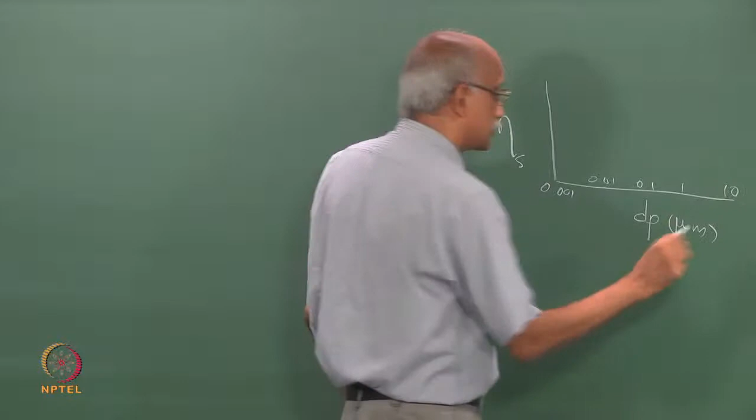So if you plot this single fiber efficiency that we talked about in the last class as a function of particle size, starting with 0.001 microns, 0.01, 0.1, 1, 10 and so on, what do you think this curve will look like? I will give you a couple of choices: is it going to go like this? Like this? Like this? Or like this? Let's say these are options 1, 2, 3, 4.

How many think it will look like option 1? Option 2? 3, 4. Okay, let us do this again. How many for 1? Show of hands. How many for 2? 1, 3, 2, 3, 3, and 4, and the rest have absolutely no opinion of any kind.

That is wonderful. Okay, the correct answer is 4. Filtration efficiency has a minimum actually in a size range of roughly 0.07 to 0.3 microns. The reason for that is for particles that are finer, diffusion rates are very high and they can be captured quite easily using diffusion as a mechanism, and for particles that are larger, all these other mechanisms for large particles kick in like interception and impaction and so on.

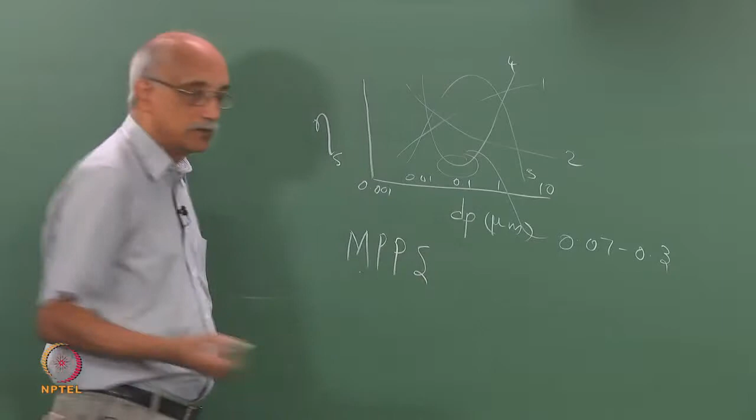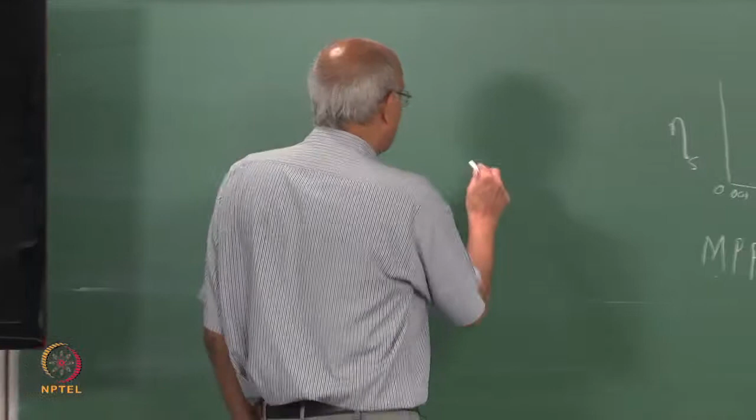So the most difficult size range to filter is 0.07 to 0.3 microns, and in fact this is called the MPPS, which stands for maximum penetrating particle size. So clearly if you want to challenge a filter under worst case conditions, you should prepare an aerosol that consists of particles in this size range and challenge the filter. That is the reason why DOP, dioctyl phthalate, is prepared either as 0.3 micron or 0.17 micron droplets or nuclei, and then this is used to challenge the filter.

When do you use this? Clearly, you need to do this only when you are trying to achieve extremely high purity conditions. Otherwise, the other 3 tests I mentioned earlier will do perfectly fine. So for example, if you need ultra pure water, or an ultra pure clean room environment, then the filters you use should be challenged with very fine particles in this maximum penetrating size range and tested.

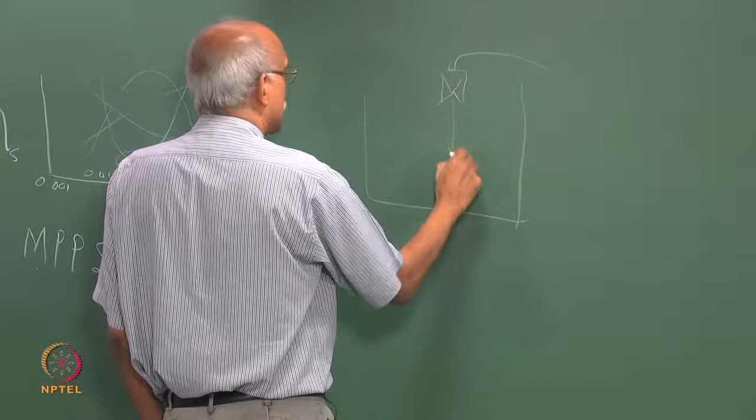For example, if you have a room that you are trying to keep clean, and you want to filter the incoming air so that this room is extremely pure, you have to use filters. Typically the way this is designed is the incoming air goes through filters, a bed of filters in the ceiling, and the air goes through these filters and enters the room, typically in a vertical flow.

This type of clean room is called a vertical laminar flow clean room. The room is sealed everywhere except in the ceiling through which you draw air, so you can make sure there is no leakage and all the air that comes in is purified to a specified level. But then you have to provide an exhaust path, otherwise, if this is a solid floor, this air will just keep recirculating.

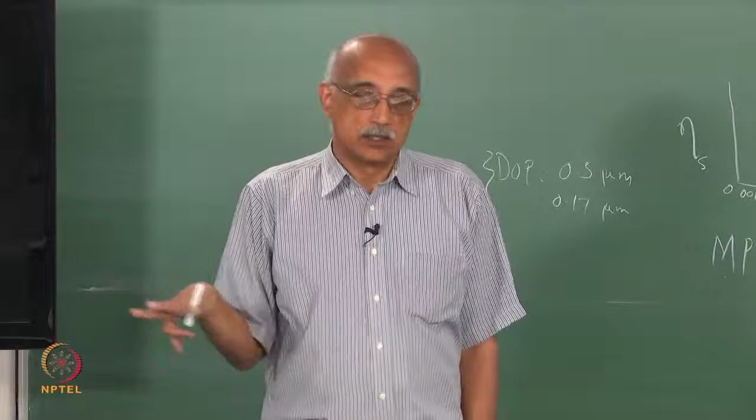Inside this room you are running a process, making a product, running tools and equipment, people are inside, so there is constantly particles being generated. If you did not have a return or exhaust path, even though the air coming in may be very pure, very soon the particle level will start building up and it will become extremely dirty.

So typically what is done is the clean room will have a false floor with vents that the air can be drawn through. So all this air, instead of recirculating, will get sucked right through here and will exhaust from the room. This is called a raised floor clean room.

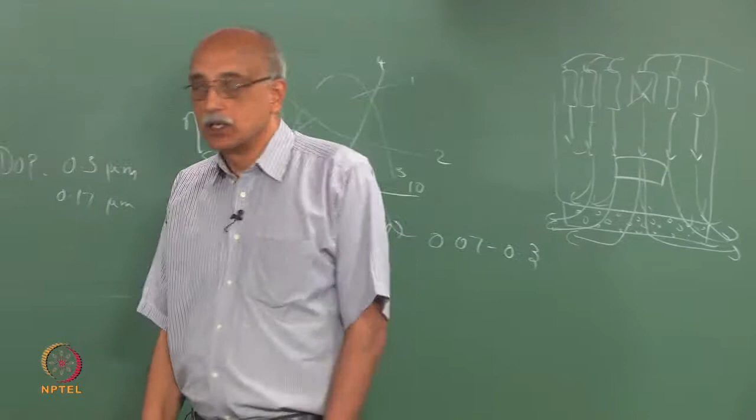The concept is that you do not want to set up recirculating paths near the floor, which will eventually cycle particles back again into the room. Instead you provide an exhaust path, so you constantly keep supplying clean air and constantly keep drawing out the dirty air. In principle, you should be able to keep the room extremely clean with this type of setup.

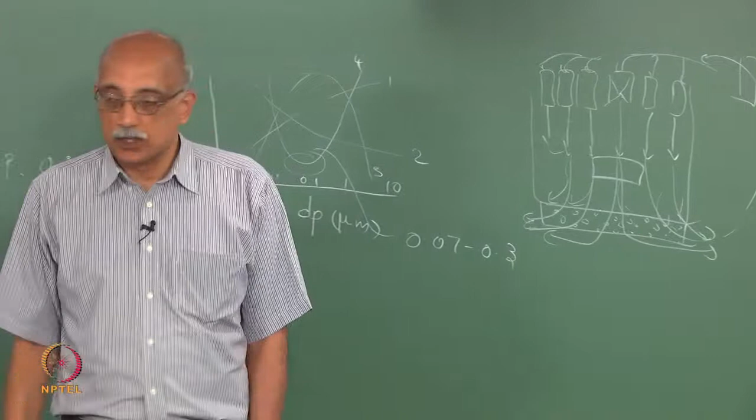Of course, you might want to consider pre-filtering this air. If you remember, we discussed last time that you need a pre-filter and then a final filter in order to achieve very high purity. So especially for the recirculated air, you may need a pre-filter, and even for the air coming in, you may need a pre-filter before it goes through the final filter before it enters the room.

The fresh air that comes in is called the makeup air, and the air that is recirculated is called recirculated air. In order to maintain a high cleanliness of a facility like this, you have to make sure that both the fresh air coming in as well as the recirculated air get filtered before they re-enter the room.

This concept, by the way, applies to product also. If you look at a hard drive, the drive itself is a mini clean room, and because the head is flying a few nanometers above the disk, you have to make sure that the interior of this disk drive is kept extremely clean. The way they do that is essentially operating it like a clean room.

There are two filters. There is something called a breather filter that filters the air coming in from outside, and there is what is called a recirculation filter inside the disk drive, which filters out any contaminants generated during the operation of the drive. That is how you keep the disk drive alive and prevent it from getting killed due to particles caught between the head and the disk.

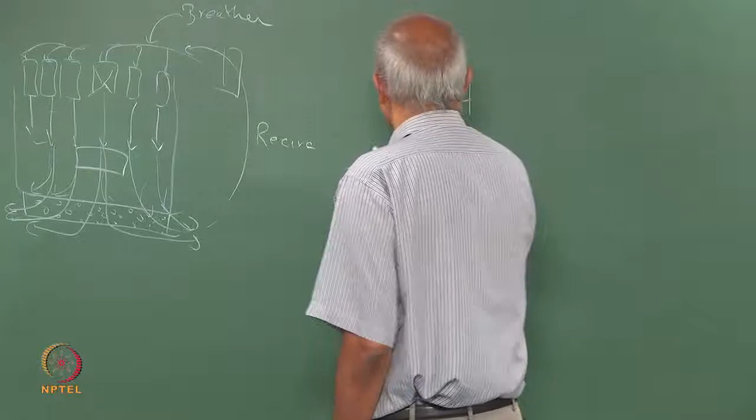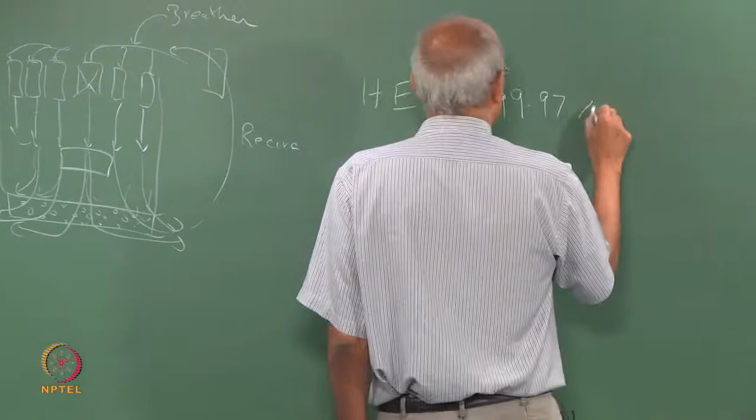Now, there are ratings of filters that are used based upon this challenge. There is something called a HEPA filter and something called the ULPA filter. HEPA stands for high efficiency particulate air filter, and by definition a HEPA filter has 99.97% efficiency for particles larger than 0.3 microns, and the ULPA filter has 99.997% efficiency for particles larger than 0.17 microns.

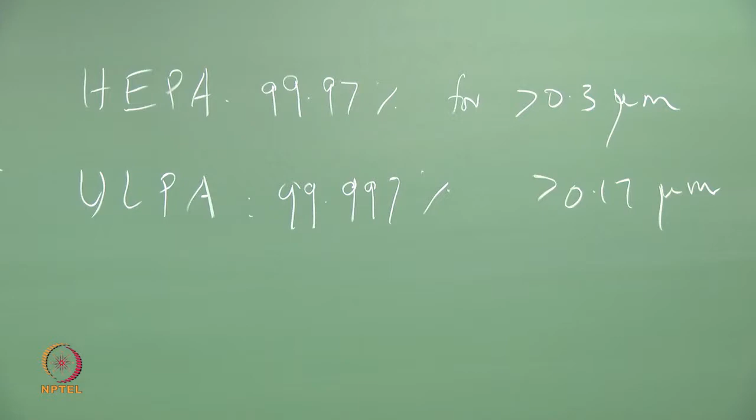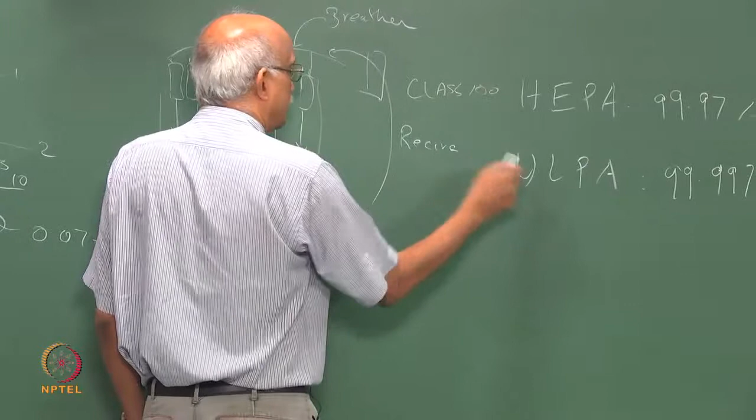So the HEPA filter is a lower level of cleanliness compared to an ULPA filter. In terms of clean rooms, for example, the HEPA filter would correspond to a class 100 clean room, and the ULPA filter would correspond to a class 1 clean room.

Again, if you remember our discussions from earlier, a class 100 clean room compared to a class 1 clean room is roughly 100 times dirtier. So, depending on the level of cleanliness you want to achieve, you will either use a HEPA filter or an ULPA filter. Obviously, there is a cost impact.

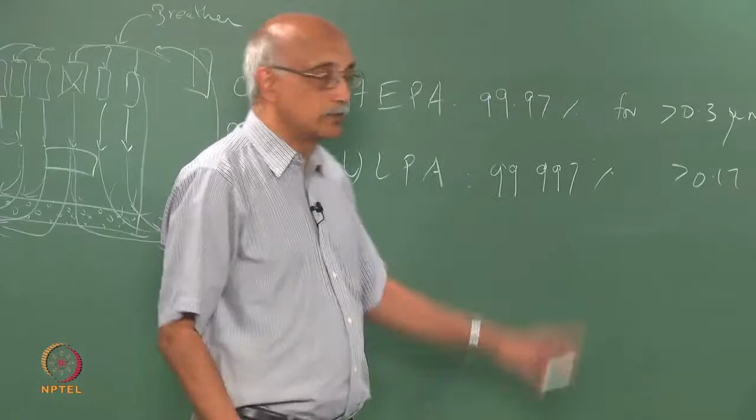The cleaner the air that you want, the more expensive it is going to be, and the certification process itself can be quite difficult. When you try to make a filter that is 99.997% effective for particles larger than 0.17 microns, you can imagine what kind of challenge that will be. So, the filter rating should be compatible with your process. You never want to have a filter that is too much or too little. It has to be exactly what the process needs. So, that is part of this challenge.

So, we have been talking about filters in one range of industry applications, which is high purity manufacturing environments that require extremely strict contamination control conditions. At the other end, of course, there are many process industries that require filtration and purification, but not to this level. So, we will talk about some of these more common industrial filters next.

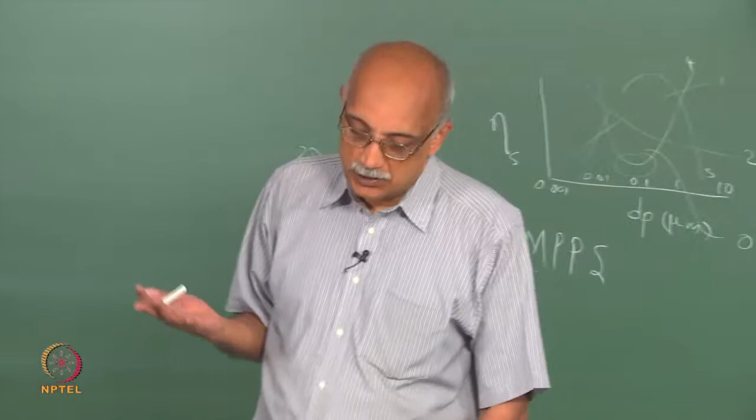Now, industrial filters are of two types: gas filters and liquid filters. Now, what is the challenge in industry? The challenge is the fluid stream that you are trying to filter may have highly varying concentrations of solids. So, you can have some fluid streams that have very dilute concentrations of solid material and some that have extremely high levels of these solid materials. So, you need to have appropriate filtration systems for the fluid stream that you are trying to handle. So, that is the first thing.

The second thing is, some filtration operations are required to be continuous, whereas some are required to be discontinuous or offline type filtration systems. So, for example, when a fluid is being fed directly into your process, you need a continuous filtration system which constantly keeps its purity level at a certain standard, whereas if, for example, you are preparing water for use in your process, you may be able to do it in batch mode and supply it to your process on an as needed basis, in which case you can have a discontinuous filter.

How you operate the filter also is a way of classifying filters. Clearly, in order for a filter to work, you have to apply a pressure difference. There has to be a delta P that pushes the fluid through the filter. There are two types of filters based on how this pressure difference is set up. One approach is to keep the downstream side at atmospheric pressure and keep the upstream side at a higher than atmospheric pressure, an elevated pressure. This can be done by various means, pumps, blowers, centrifugal systems, which apply pressure on the upstream side and push the fluid through the filter. The other type of filter keeps the upstream side at atmospheric pressure and applies vacuum on the downstream side, so you pull the fluid through the system.

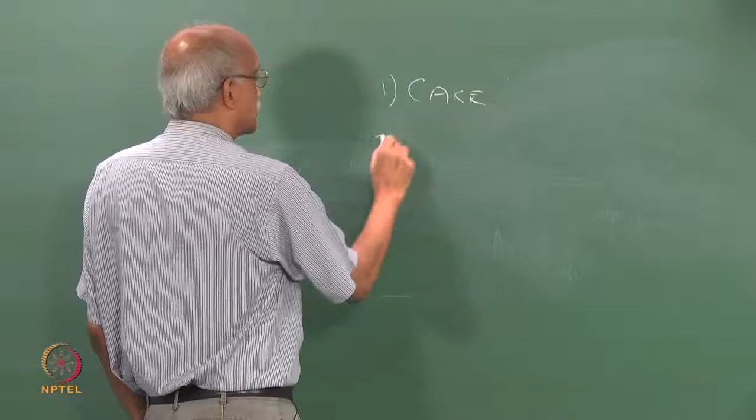So, the three types of filters based on processing capacity are: first is a cake filter, the second is a clarifying filter, third is actually a centrifugal filter.

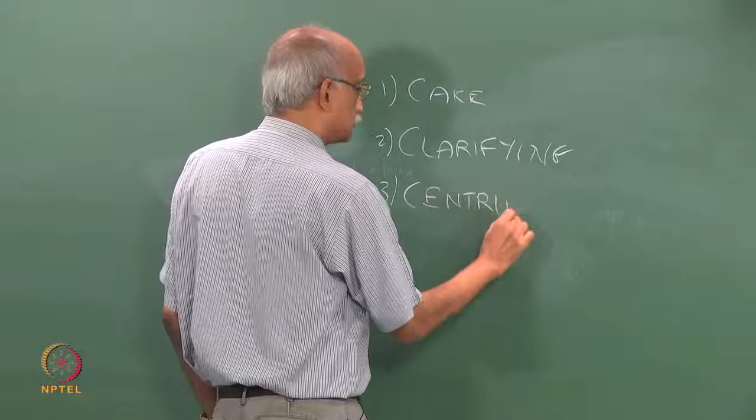A clarifying filter is one that handles low concentration slurries, so this is more like what would be used in high purity applications of this kind. The amount of solids being processed by the filter is small enough that you never really get a big buildup of material on the face of the filter. It is essentially used for clarifying, so to speak. You have a fluid that is pretty clean to begin with, with trace amounts of solids, and a clarifying filter removes those solids and purifies the fluid further.

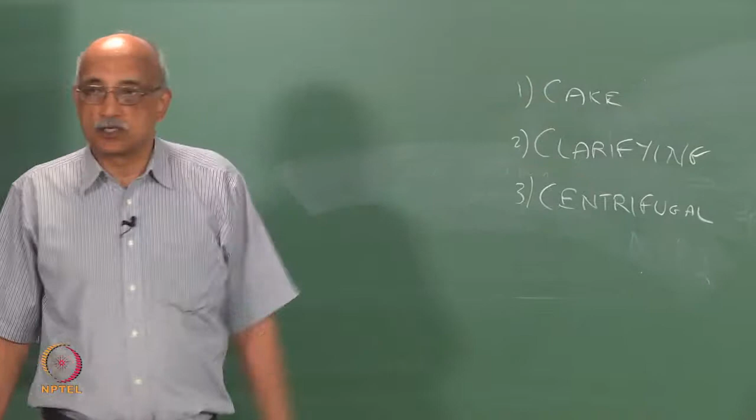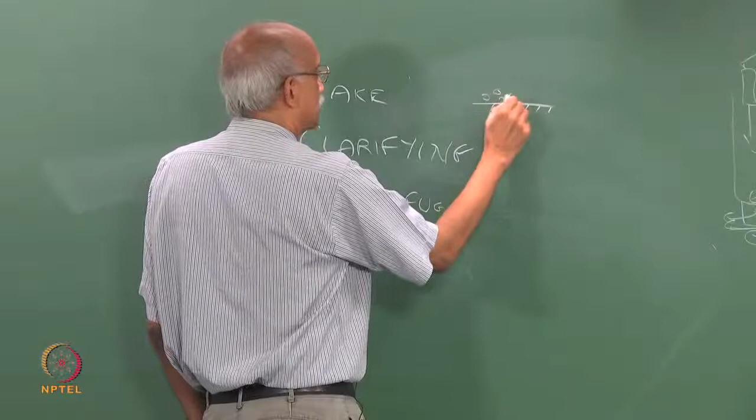A centrifugal filter, as the name suggests, is one that generates a centrifugal field and uses that to process both the cake type as well as the clarifying type of material. Clearly, this is more important for the cake type of filter because you are trying to process a large quantity of material. So, for a cake filter, if this is your filter medium, you start accumulating particles to a point where this essentially starts building up a layer right on top of it.

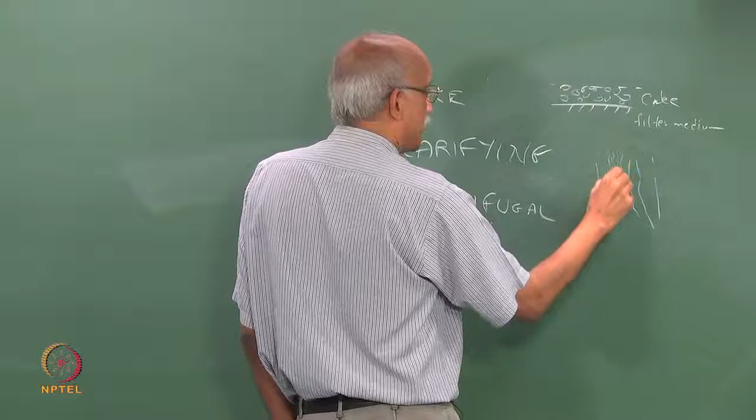So, this becomes your cake layer and this is your filter medium. Whereas in the case of a clarifying filter, you can look at it almost like a depth filter, where there are certain passages that are predefined and the particles just go right through. So, you do not really build up a layer on top. As the particles approach, there is sufficient space for them to penetrate into the filter and get filtered out.

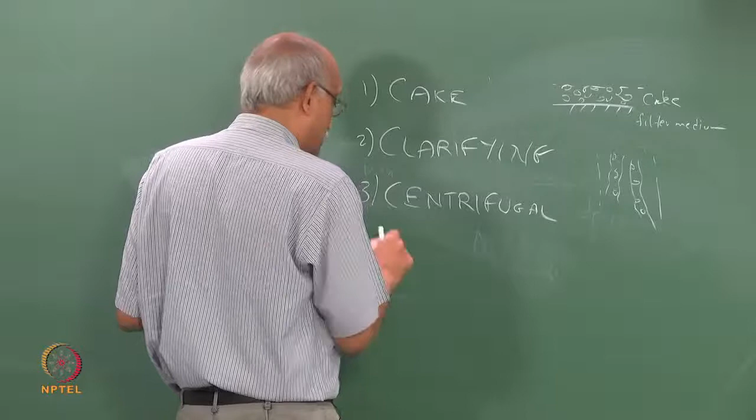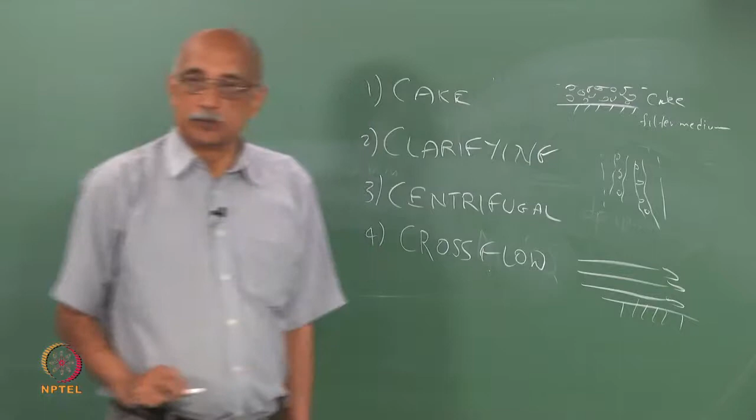The third type—actually there is a fourth type—which is what's called a cross flow filter. In a cross flow filter, the filter is actually held parallel to the flow of fluid. Now, in virtually every other case, as you can imagine, the fluid has to be pumped normal to the filter face in order for filtration to happen. The cross flow filter is an exception, where the fluid is actually being pumped at fairly high velocities across the filter face. Now, the reason you want to do this is that this is typically done for high concentration slurries.

It prevents the problem of cake buildup, because as solids deposit on the surface, you do not allow them to build up. You use the cross flow velocity to continuously remove particles as they deposit, and so you are left with a very thin layer on the surface of the filter.

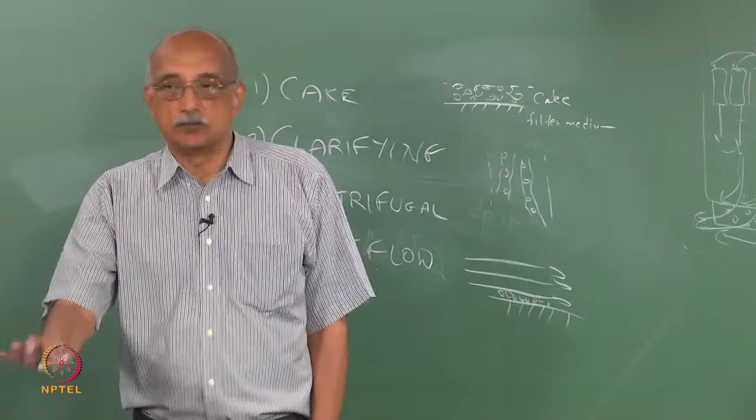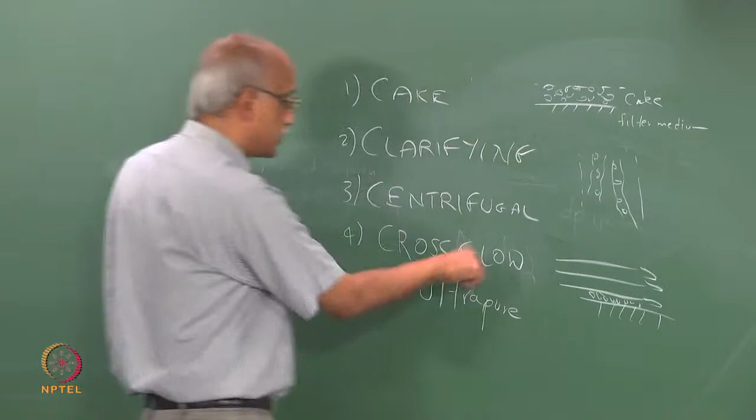There is something called an ultra pure filter, which uses cross flow with extremely fine pores on the filter to achieve very high cleanliness levels of the fluid. This is typically used when you are trying to filter out things like high molecular weight vapors and colloids from a fluid stream. So, it goes down to sizes that are nano dimensional or smaller, and probably represents the highest purity that we can achieve.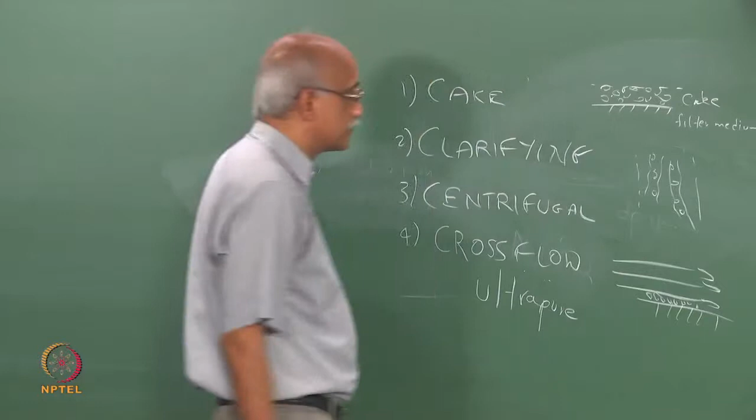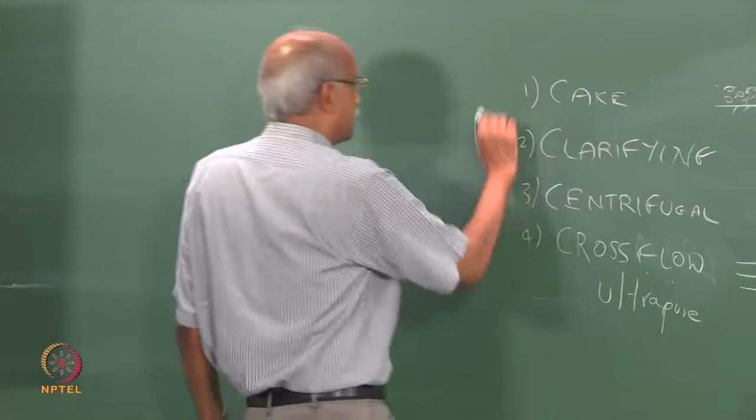Now, in terms of where these are used, clearly the cake filter is only used for liquid solid separations. The expectation is most gas streams will not have high enough levels of solids that you would require a cake filter. So, cake filter is normally associated with liquids, whereas the centrifugal and the cake filter are primarily for liquid solid separations. The clarifying filter and the cross flow filter can be used both for gases as well as liquids.

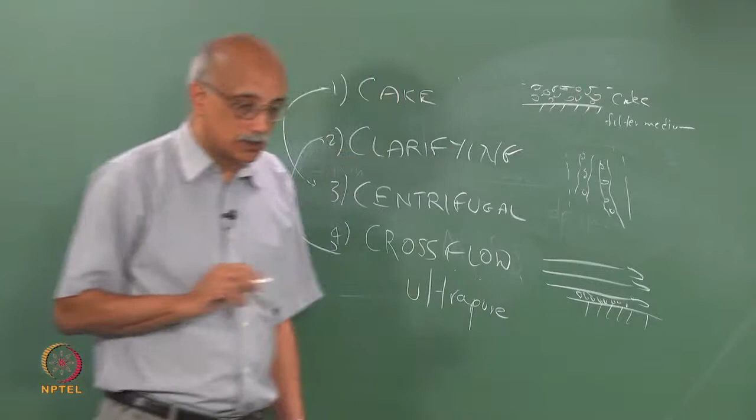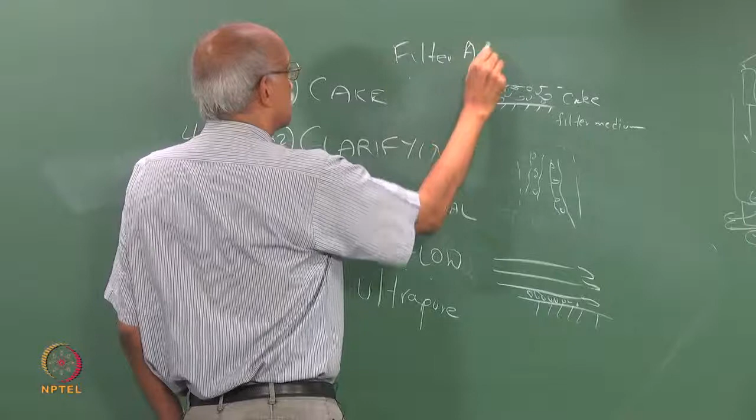So, a couple of other things you should keep in mind when designing a filter system: if you have a cake filter, eventually you are going to start building up a solid layer, which is going to introduce pressure drop and so on. So, you want to keep the cake porous during processing, and that is done by using what are known as filter aids. A filter aid is introduced to the slurry before it approaches the filter in order to increase the porosity of the cake and maintain low pressure drop and high filtration efficiency.

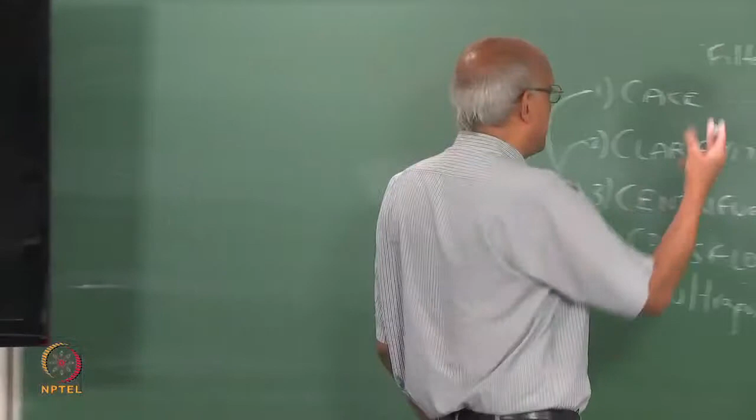Typical filter aids are materials like asbestos, diatomaceous silica, and a few other materials. They have the property that by mixing in with the cake, they can actually make the cake more porous. Of course, eventually they have to be removed from the cake in order for them to be either discharged or reused. So, you do have to have a way of separating the filter aids from the cake before reusing them or preventing them from being an impurity.

One advantage of this centrifugal filter: one of the problems when collecting a filtrate is that sometimes the filtrate may be your product and you may want to recover what you have filtered. In many cases what you filter out you want to discharge, and that is when it's being used as a purifier. However, there are cases where you want to use a filter to collect particles either for analysis or to use as a product.

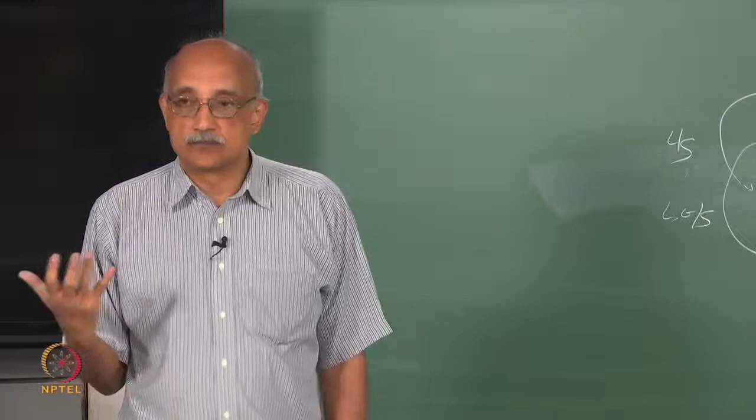For example, nanofilters are used to collect nanoparticles for further processing in industry. You have to have a way of recovering the particles collected in the filter medium, which means you have to first remove the liquid that is collected along with the particles in the cake. There has to be a way of removing liquids from the filter cake before separating out the particles, and here centrifugation helps, because by centrifugation you can spin out a lot of the excess water from the filter media, making it easier to separate out the particles.

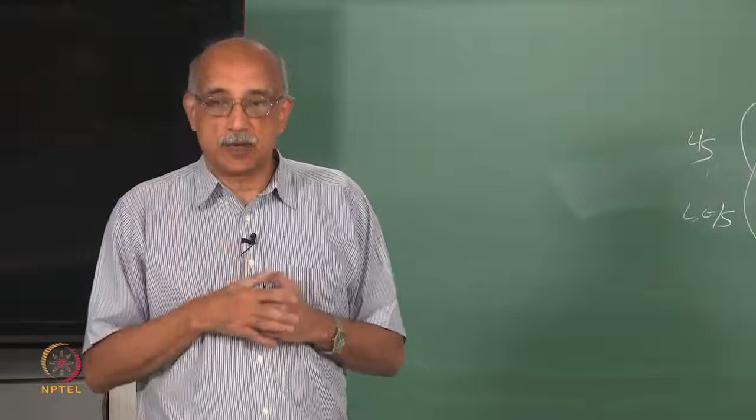Again, in cross flow filtration, the potential for solids accumulation is much less, so you don't have to worry so much about the separation process. But separation of the filter liquid and separation of the filter aids are both things you have to keep in mind if you need to recover the filtered material as your product. If not, it's fine. You do have to recharge the filter once in a while, so you need a way of removing whatever collects in the filter medium and discharging it. You have to keep that in mind as well.

This is basically how industry filters work, and what we need to do next is focus on what is happening inside the filter as the filtration happens. Let us talk about the cake filter, because that is the most common type of filter used in industry.

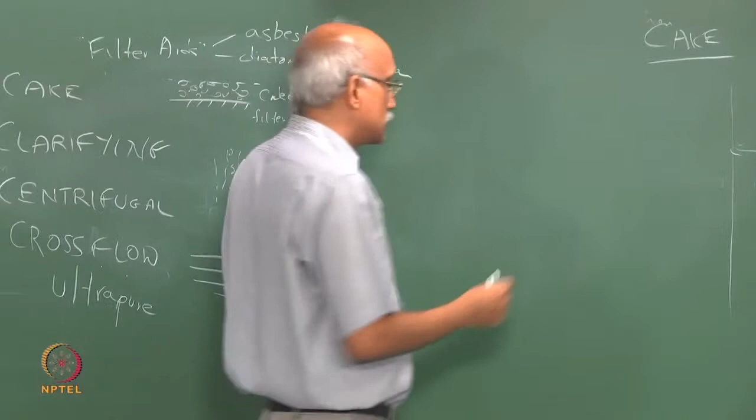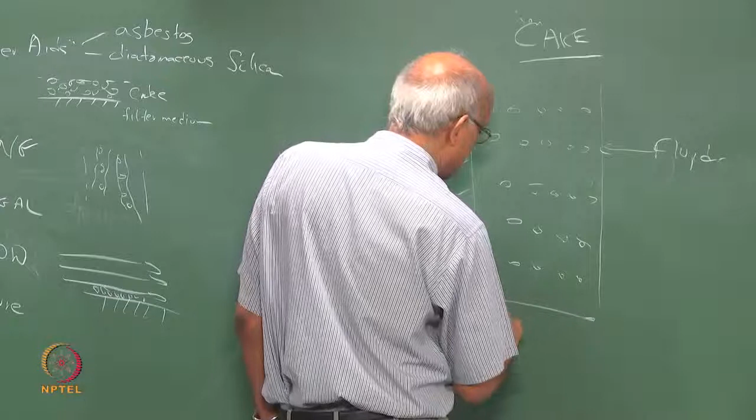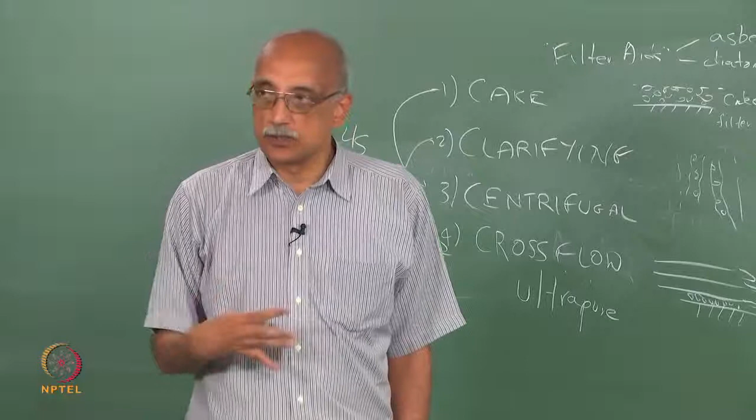Let's say you have a fluid approaching from this side and you have the filter medium here. In a cake filter, the cake starts to build up on top of the filter medium. At time equal to 0, let's say this is your LC, the thickness of the cake. At time 0, this length will be equal to 0, and then with the progression of filtration time, the cake will start to build up, along with the filter medium itself.

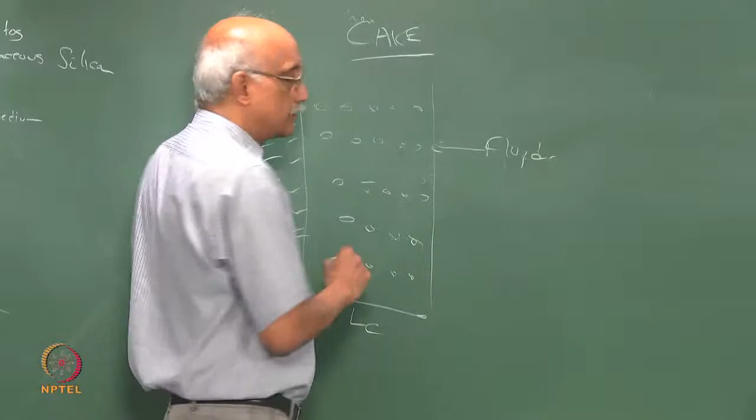So how do you model the resistance to flow in this case? How many components are there? There are actually 3 resistances in series. There is a resistance to the solids approaching the filter. At time equal to 0, they will be approaching here, and then with progression of time they will actually be approaching the cake rather than the filter itself directly.

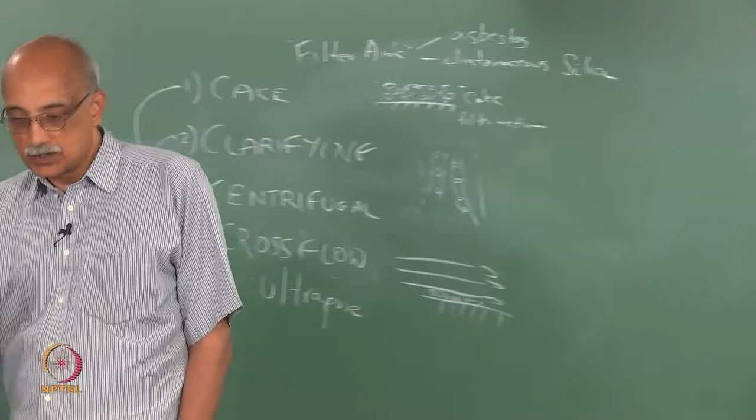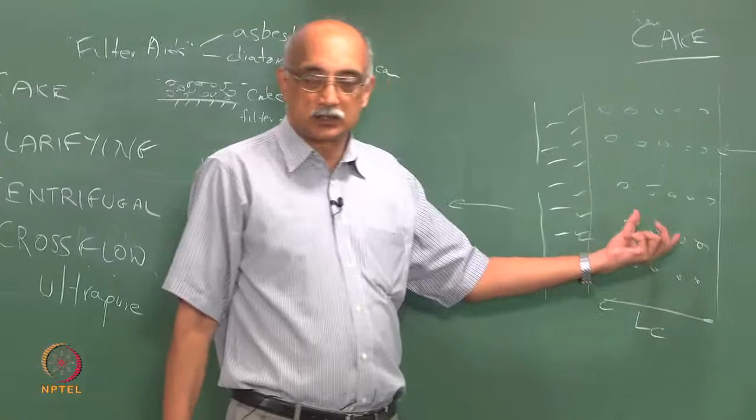So there is a resistance to flow as it approaches the filter or the cake, and there is also a resistance to this flow - suppose this is your filter medium and the purified liquid goes out this way - but those are likely small compared to the resistance across the cake as it builds up, and the resistance across the filter medium itself as well as due to any particles impregnated in the filter medium.

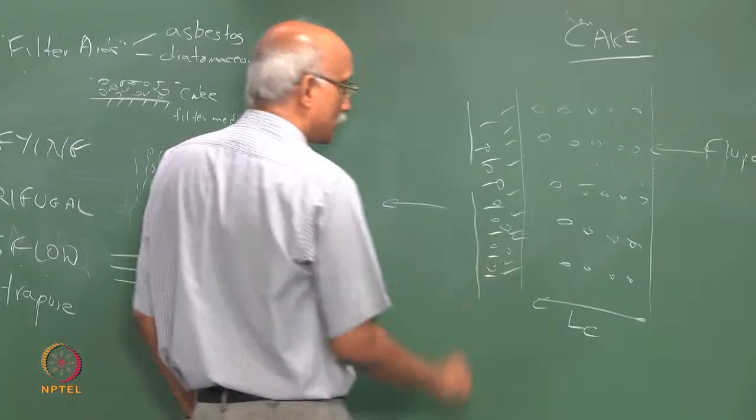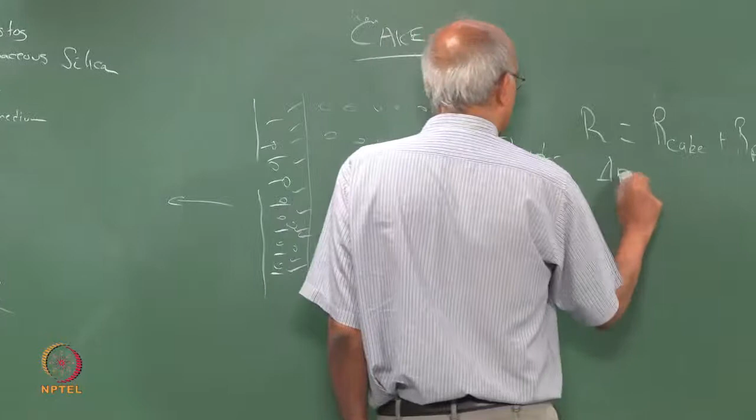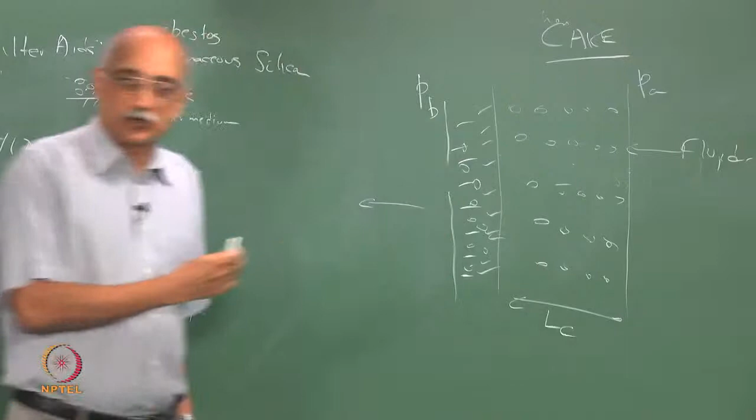So the resistance to flow can be taken as R cake plus R filter, and what does that contribute to? Pressure drop. So delta P is again a combination of delta P in the cake plus delta P in the filter. If you call this some PA and the pressure at the exit from the filter as PB, the overall pressure drop is PA minus PB.

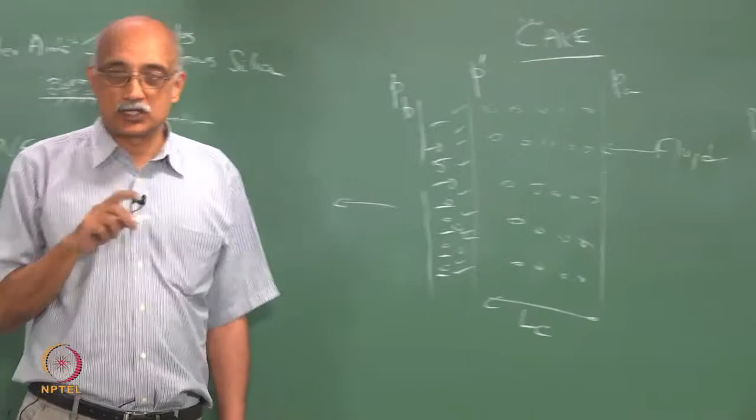But what you can do is split it into, let's say this is some P prime. P prime is the pressure at the interface between the cake and the filter. So you can write this as PA minus P prime plus P prime minus PB, or delta P total equals delta P cake plus delta P filter.

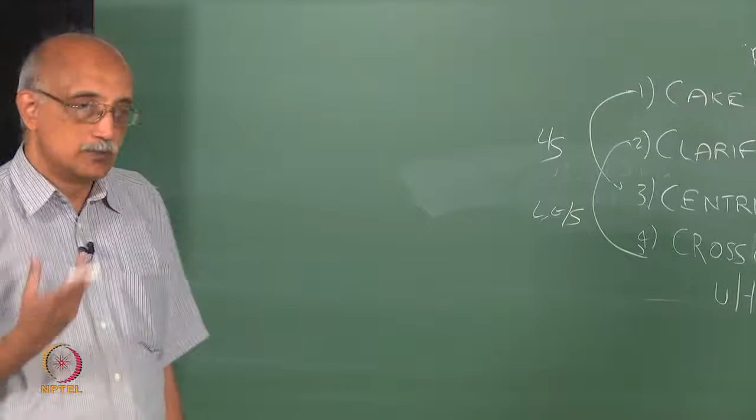Now, in the last class we already talked about this. The pressure drop across a filter is some constant K, which is a function of the volume fraction, times mu, times an approach velocity or characteristic velocity as the fluid is pumped through, times a specific length - that is the fiber length divided per unit area. So we know how to calculate pressure drop across the filter.

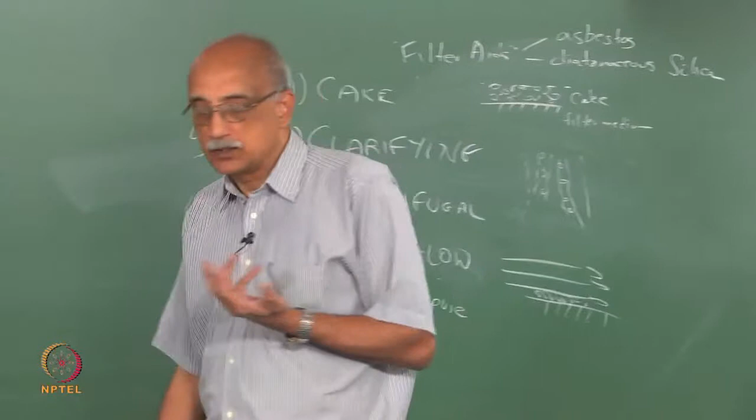How do you calculate pressure drop across the cake? You do that by modeling the cake as a porous solid, a porous bed, and there are standard equations in chemical engineering literature that express the pressure drop across a porous bed as a function of various parameters associated with the bed.

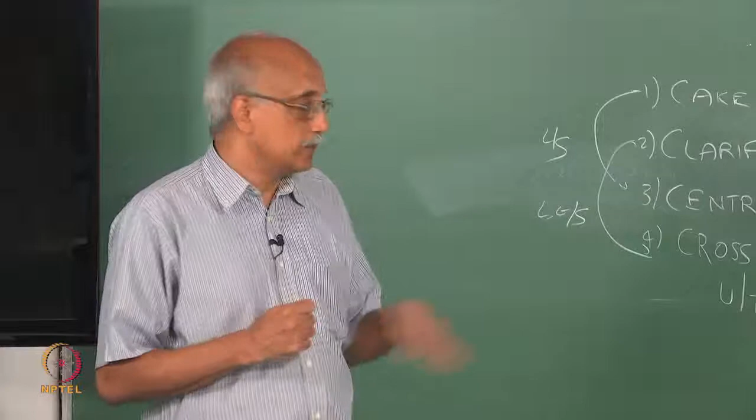There is a classic equation called the Ergun equation. Probably what we will do is later in this course, if we have time, we will go through at least one lecture where we look at the basics of how we derive this, but for the time being let us take an empirical expression for this delta P.

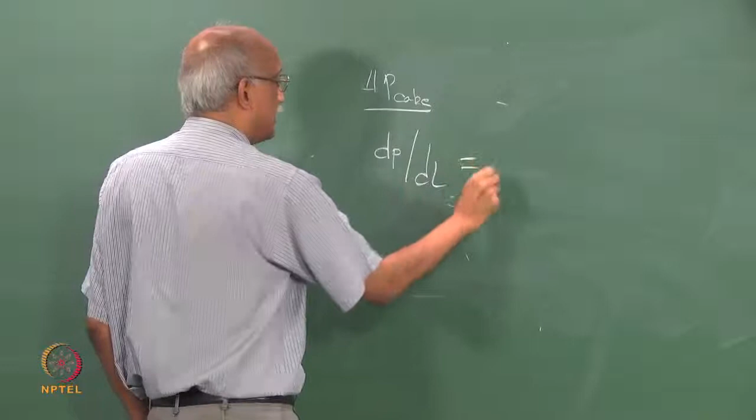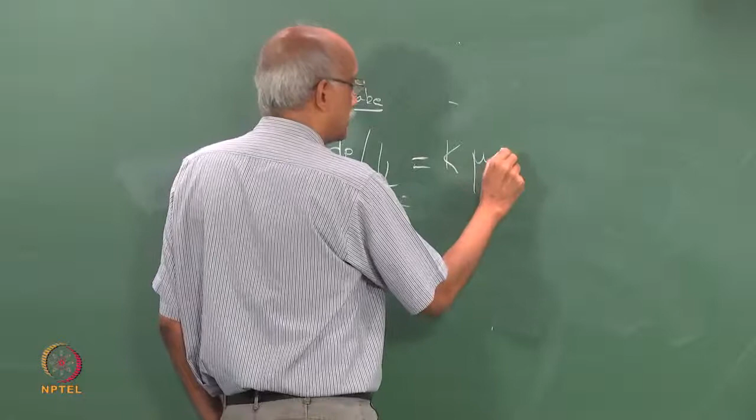So, what we are now looking at is the delta P across the cake. It is modeled as follows: dP over dL, the variation of pressure across the length of the filter cake, can be expressed as some constant times mu times u times Sp by Vp the whole squared, which is again the surface area per unit volume, so it has units of 1 over length, times

1 minus epsilon squared over epsilon cubed, where epsilon is the bed porosity, it is 1 minus the volume fraction of solids.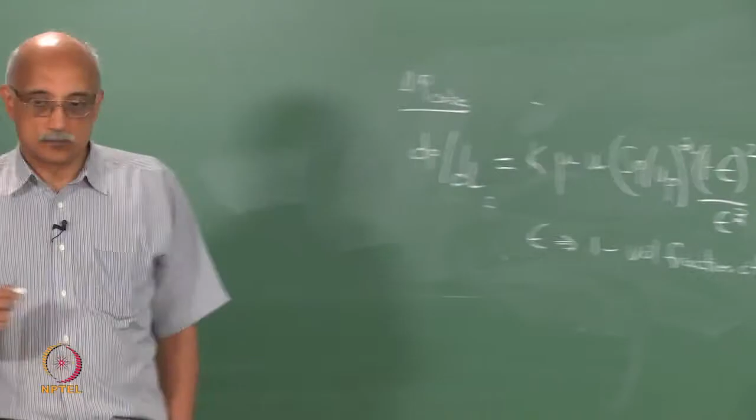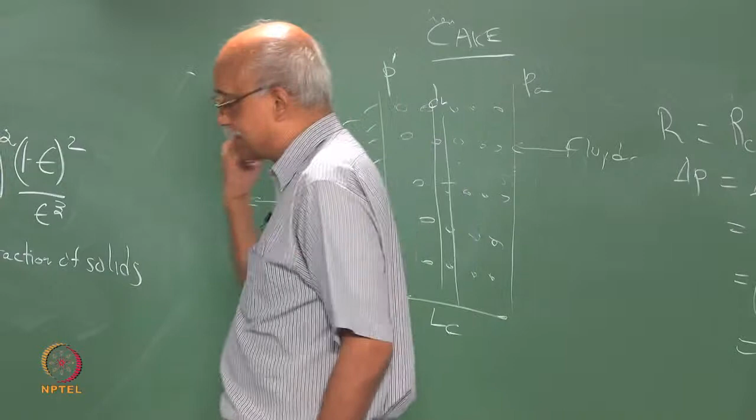So, this is a general expression for how pressure varies across the length of a porous solid material like the cake. Now, if you take a small layer dl and you look at the solids volume in that layer dl, it is going to be equal to A times dl, the total volume of that small element, times 1 minus epsilon.

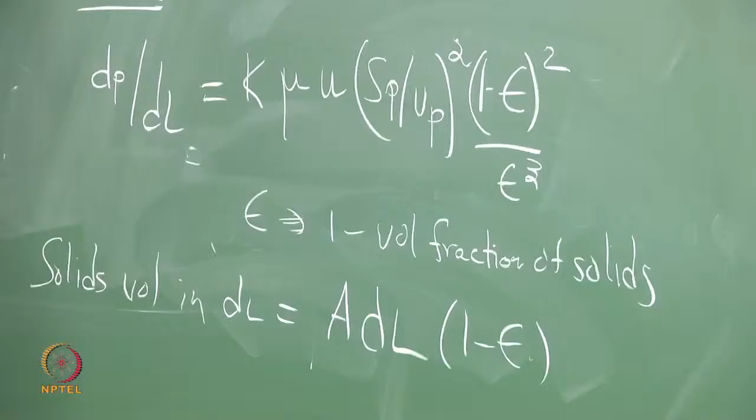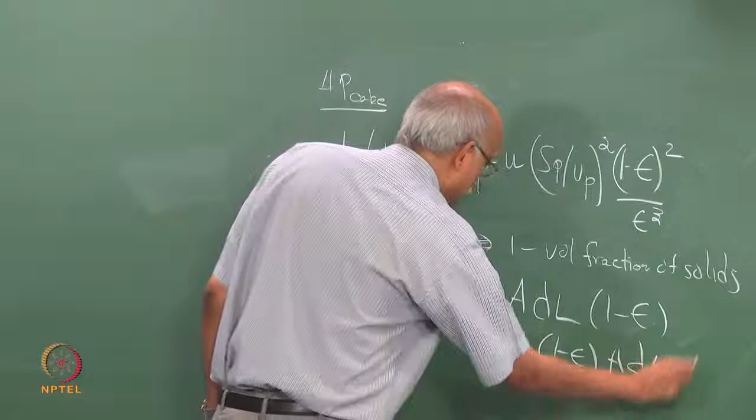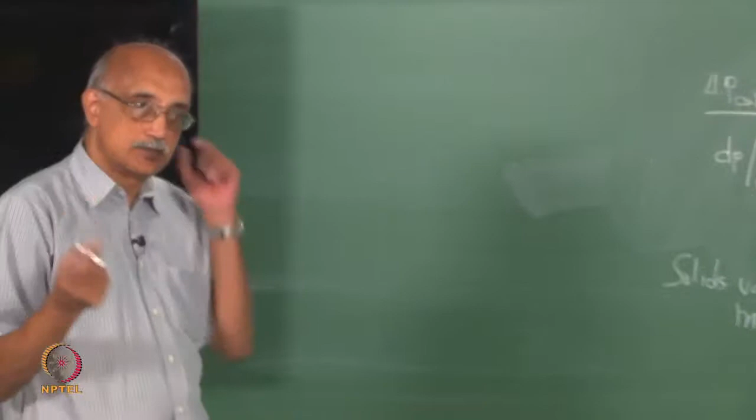Because epsilon is a porosity, what is the solid's mass in the same volume? Just multiply this by rho p. So, it is rho p times 1 minus epsilon times A times dl, and you can call this dm. That is the small amount of mass present in that layer dl.

So, what do we do with this? In this expression you can write dP as equal to... you can express dl times 1 minus epsilon as dm by rho p times A.

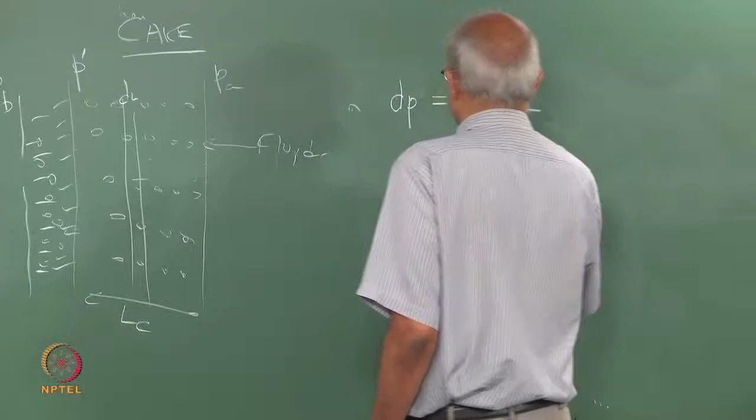And then you have k times mu times u times Sp by Vp the whole squared. So, you have taken out 1 minus epsilon, so this just becomes 1 minus epsilon by epsilon cubed.

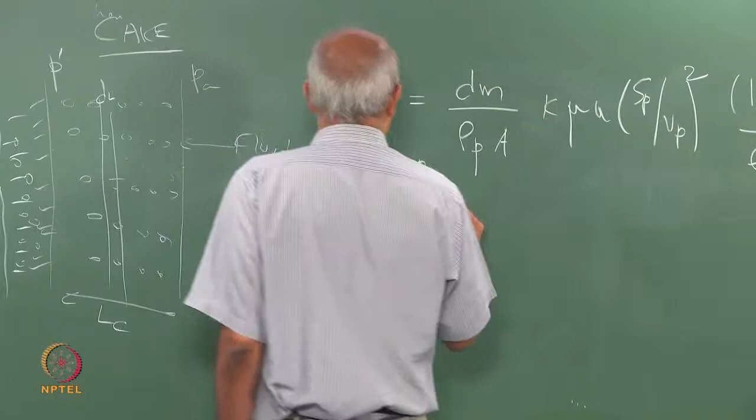So, now you have a differential expression for dp. You can integrate this from Pa to p prime of dp, which is equal to delta p of the cake, and that will be the integral of this. Essentially what we are going to do is assume everything else here is constant except dm, which is varying. So, you can rewrite this as mc, integrating dm from here to here.

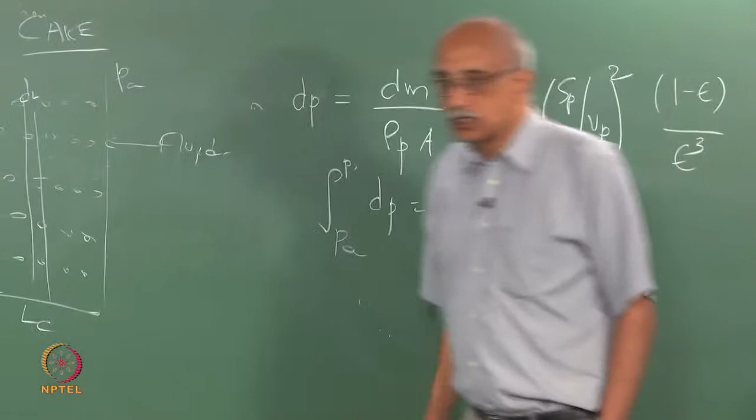That gives you the total mass of the cake, mc, over rho p times A, times some constant, times mu times u times Sp by Vp squared times 1 minus epsilon by epsilon cubed. So, this is now your expression for the total pressure drop across the cake.

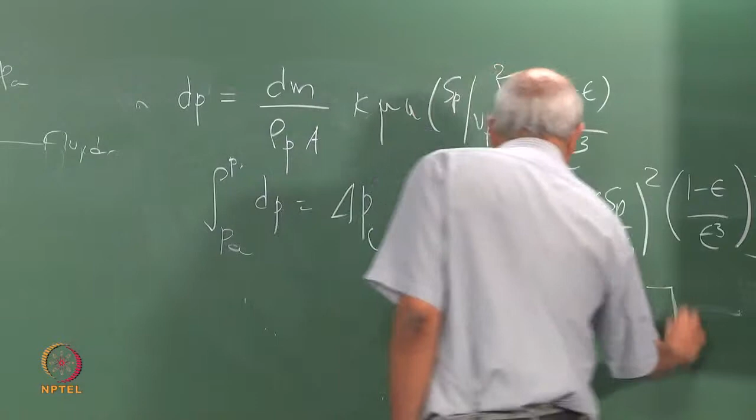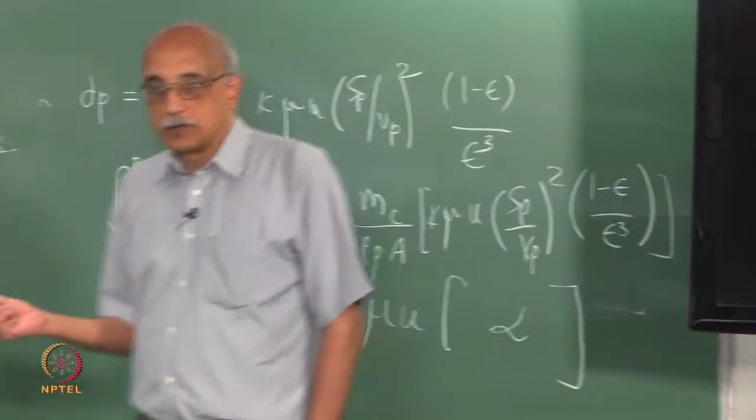And in fact, if you group everything here other than k mu u, whatever remains - that is mc by rho p A times Sp by Vp the whole squared times 1 minus epsilon by epsilon cubed - you just call some parameter alpha. So, delta p cake can be simply expressed as k mu u times alpha.

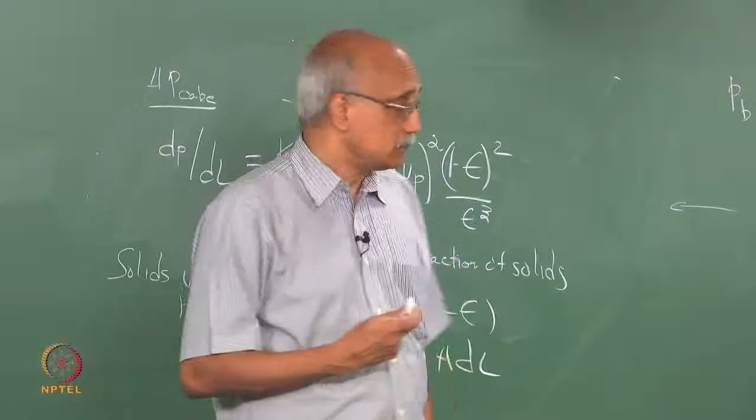And as we have seen before, delta p filter can also be expressed in a very similar fashion as k mu u times a specific length. So, the total delta p is then equal to delta p cake plus delta p filter. That is interesting because it gives you a very basic method of calculating pressure drop over the entire system of cake plus filter.

Now, there are two modes in which filtration is done. One is called constant rate filtration, the other is called constant pressure filtration. In constant pressure filtration, you keep the pressure constant, which means the flow rate will keep dropping over time as the solids build up in the filter. In constant rate filtration, you keep the rate of flow constant, which means you have to constantly increase the pressure. So, these are the two modes in which filters can be operated.

Normally what is done is you use constant rate filtration until you reach a certain maximum pressure that you can allow. After that, you keep the pressure constant and do constant pressure filtration, in other words you allow the rate to decrease over time. So, we will see how we can actually model those two types of behavior.

So far we have been looking at a steady state picture, but it is important to understand the transient behavior of cake filtration systems. We will also look at continuous versus discontinuous filtration and how we can develop some mathematical models to describe that.